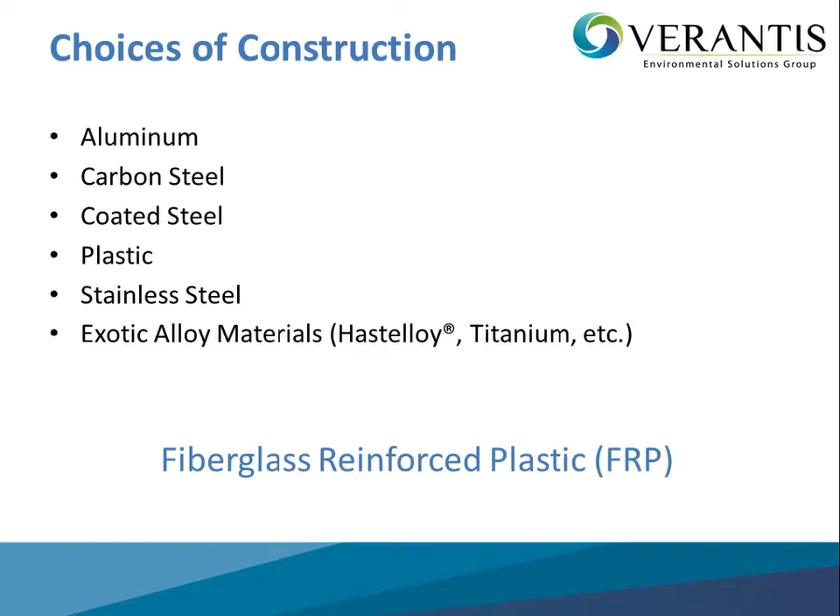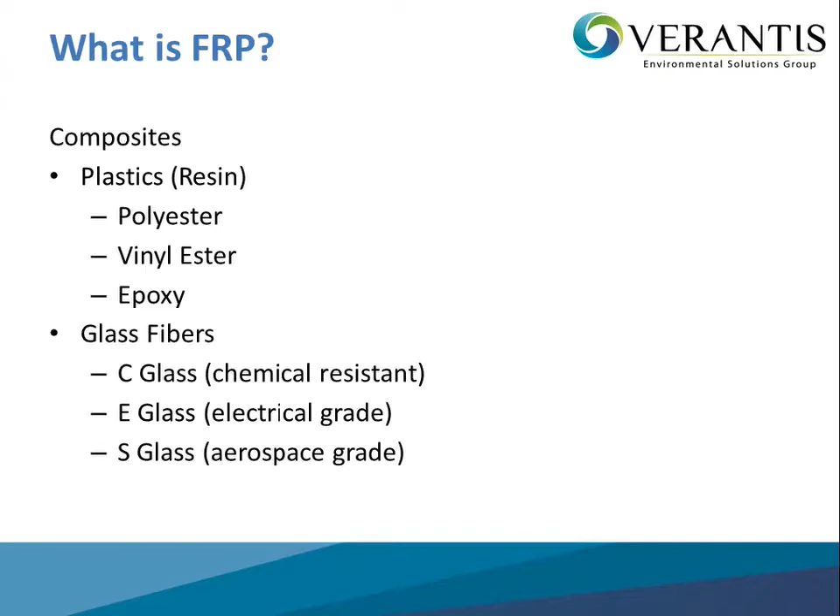And that leads us to the discussion of FRP. FRP is fiberglass reinforced plastic. It's a composite material of plastic and fibers used for strength. Some of the more common resins are polyester, vinyl ester, or epoxy. The glass fibers used in industry are a C-glass, which is chemically resistant, an E-glass, which is an electrical grade, or an S-glass, which is used for aerospace applications. Verantis is standardized on the use of premium vinyl ester resin and a mix of C-glass and E-glass.

So what makes FRP so special? The number one reason people investigate the use of FRP is because the airstream that process is corrosive in nature. This means using a metal fan or a metal coated fan is not a desirable option because the material of construction is not compatible with the process. FRP is typically less expensive than most alloys, especially hastelloy and titanium. The glass fibers used strengthen the resin and make them an incredibly strong composite.

FRP, since it's not metal, is incapable of generating a spark by the material hitting against itself. Whether the fan is moving corrosive air, sitting in a corrosive environment, or baking out in the sun all day, FRP fans last longer and are more durable. For example, we have an FRP fan in the New York area that's been running 24/7 for the last 35 years, and they've only had to change out bearings and belts on it. They've taken good care of that fan to keep it running long.

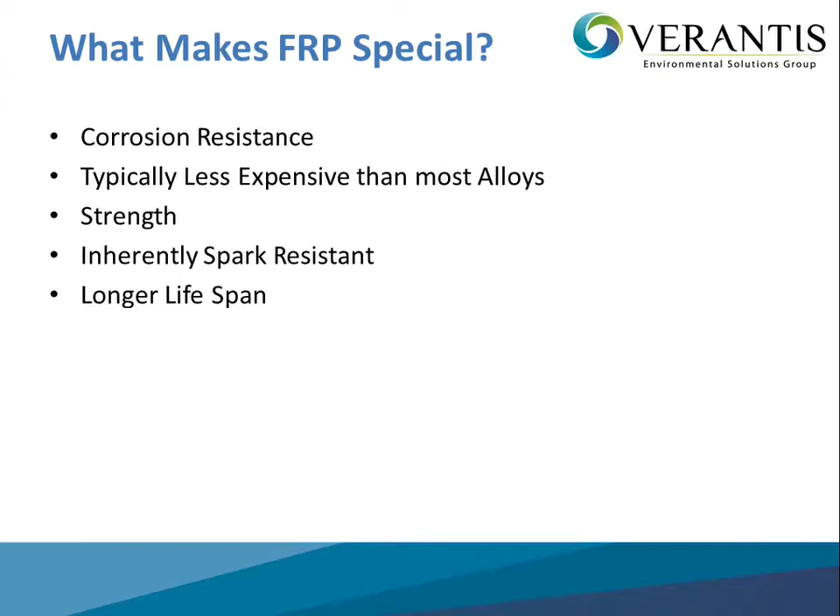So how is FRP fabricated? There's a couple different methods. We've highlighted a few of them. The first being hand lay up. This is a process that we use in our impeller department, as well as other parts of our fabrication process. The picture on the right shows them rolling out the mat and the resin in that arc shape, which is used for the impeller blades themselves, and attaching the blades to the back plate.

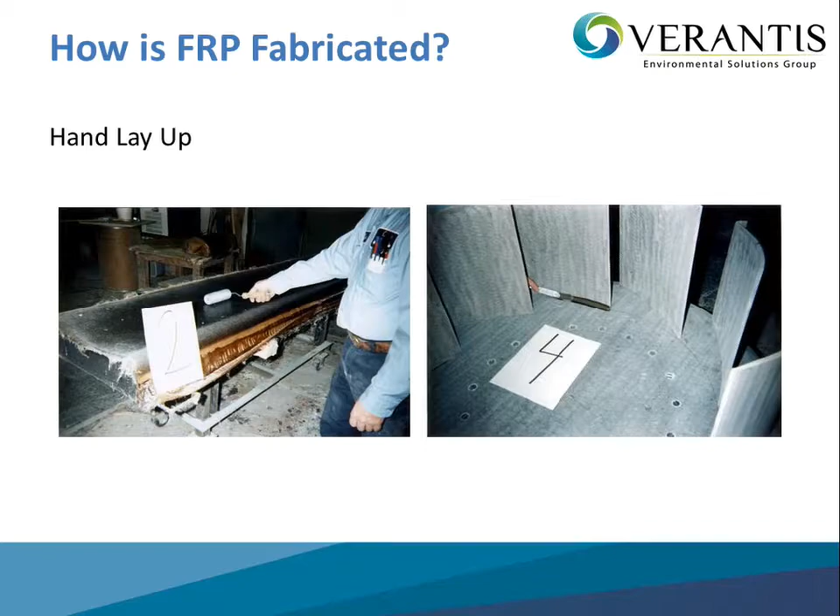There's also chop spray molding. You can see here that there's a continuous feed of glass, which is chopped in with resin as it's sprayed out the end of the gun. This process is used to fabricate parts that we have molds for, used for a variety of parts such as belt and shaft guards, inlet bells, some of our fan housings, and transitions.

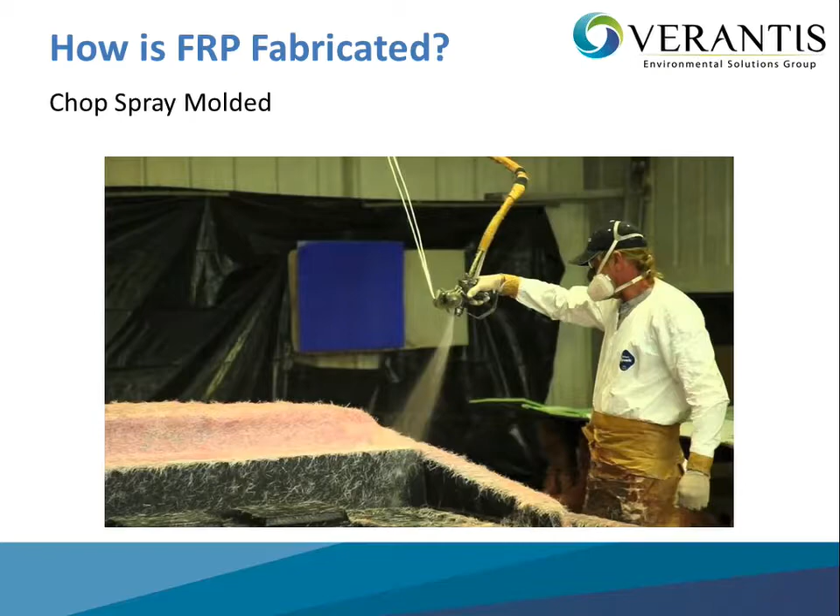A couple other ways that FRP is fabricated out there is vacuum bagging. Usually you'd see this with boat fabrication or large solid pieces of FRP. And there's also injection molding.

A lot of different industries out there where FRP can be used. Some of the more common ones are listed here: a wide variety of chemical processes, particularly hydrochloric acid and chloride salts; food processing plants; pulp and paper, which uses FRP to exhaust chlorine dioxide fumes from paper washers or pulp washers in bleach plants; metal processing and refining, where FRP is one of the best choices because of the high concentration of chlorides, while metal alloys only offer limited protection; semiconductor manufacturing; pharmaceuticals; mining, particularly salt mines and other mining processes where methane gas needs to be vented out; rubber and plastic manufacturing; and my favorite, wastewater treatment plants, where they have to exhaust hydrogen sulfide and odor control.

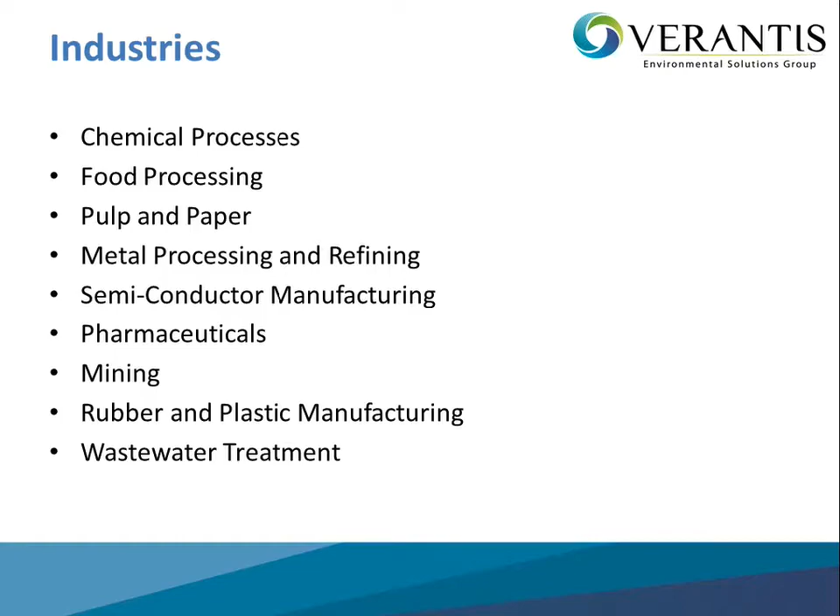This is a look at what's inside our Verantis FRP. The top picture shows an impeller construction, the bottom shows the housing. Notice the airstream surface corrosion barrier layers, made up of C-Veil, 1 ounce of mat, and 2 ounces of chop spray mat. The structural layers in between will vary depending on the thickness desired. The C-Veil may be substituted with Nexus, which offers added corrosion resistance for specific applications. The exterior of the fan is covered with a top coating which contains a UV inhibitor.

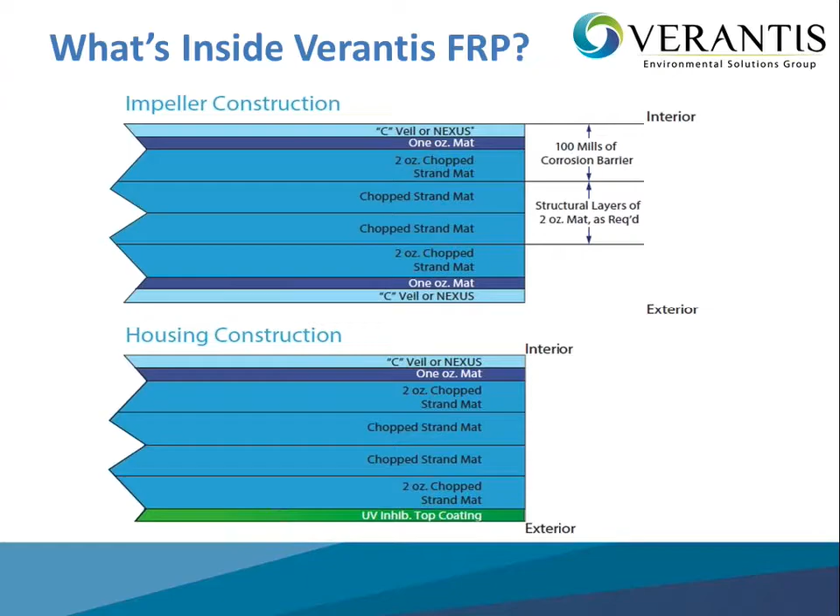This is a list of some of the things Verantis has settled on as standards in our manufacturing process: chemically resistant C-Veil on all interior surfaces, which can also be substituted with Nexus; a fully FRP-encapsulated steel hub; one of the fans that truly has no exposed metal in the airstream; and our impeller hub protrudes out of the housing so that no part of the shaft is inside the housing.

Our balancing exceeds industry standards. As mentioned, we have a UV protective coating on the exterior surfaces. The resins we choose to use have a flame spread rate of 25 or less. We've standardized on oversized bearings and shafts to increase life expectancy. We also use 316 stainless steel bolting and fasteners, FRP OSHA guarding, and our product is very customizable with reasonable lead times.

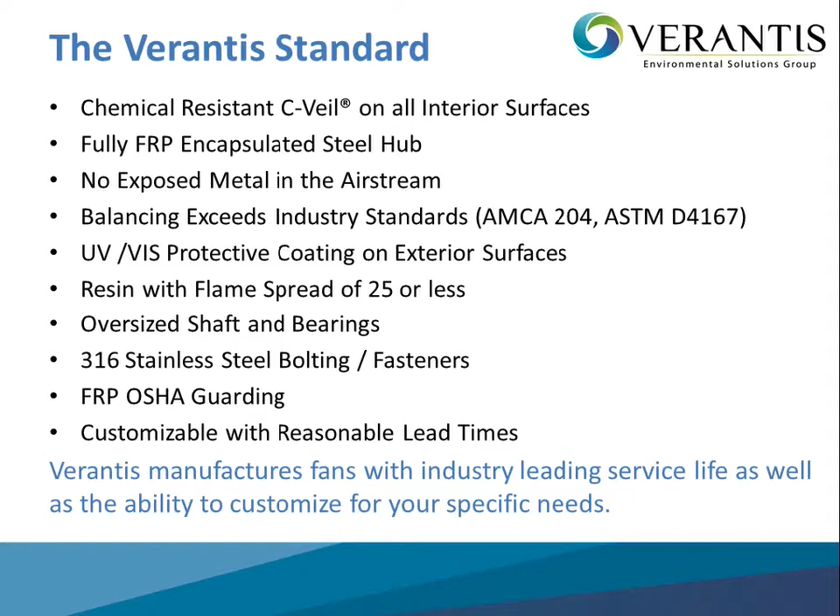All these words are great, and a picture can speak a thousand words, right? As part of our R&D efforts, here are some differences that set us apart from the rest of the industry. On the left is a picture of a carbon steel shaft which sat outside and got rained on; within a couple of months it was completely rusted. Unpainted shafts will start to corrode in as little as 24 hours. On the right is our standard carbon steel shaft, which we paint after assembly, greatly extending service life with reduced corrosion.

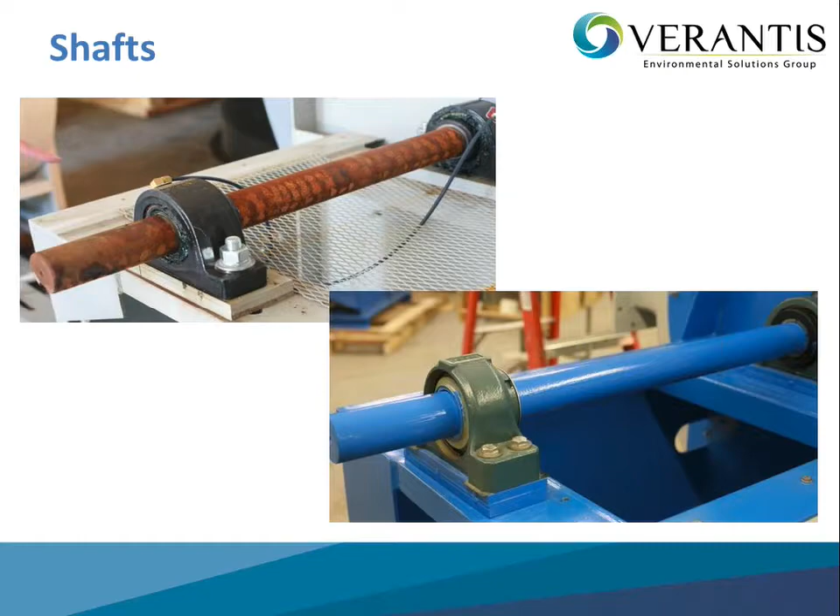In the airstream, the picture on the left shows a shaft permanently bonded to the hub and then encapsulated in FRP, but they neglected to coat the entire shaft, which will come in contact with the airstream. On the right is a picture of our fully encapsulated hub, which protrudes out of the housing in order to comply with the requirement that there's no exposed metal in the airstream.

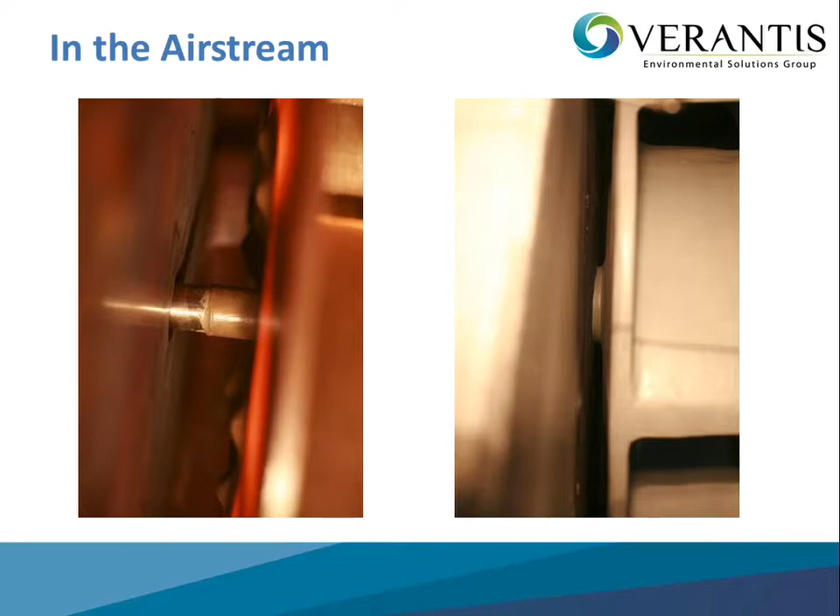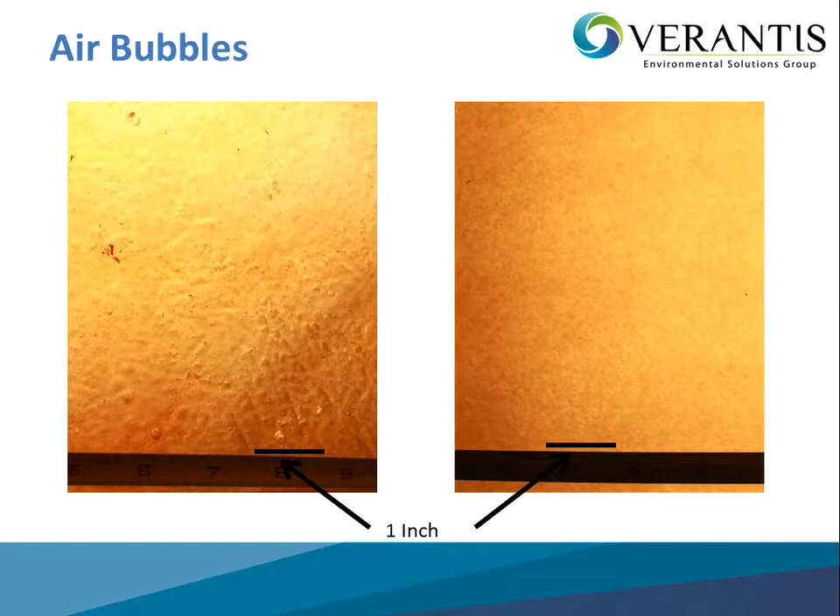Air bubbles will reduce the strength of FRP, but most importantly they may seriously affect the corrosion resistance. According to ASTM C 582, there are standards on entrapped air bubble sizes and quantities per area. The picture on the left violates both of them. The picture on the right is our FRP, which is clear. For those who think I just picked a small section of the good and the bad, this is a picture of what we cropped to show that—so you can get a bigger idea, 10 inches on each side, of what the FRP looks like.

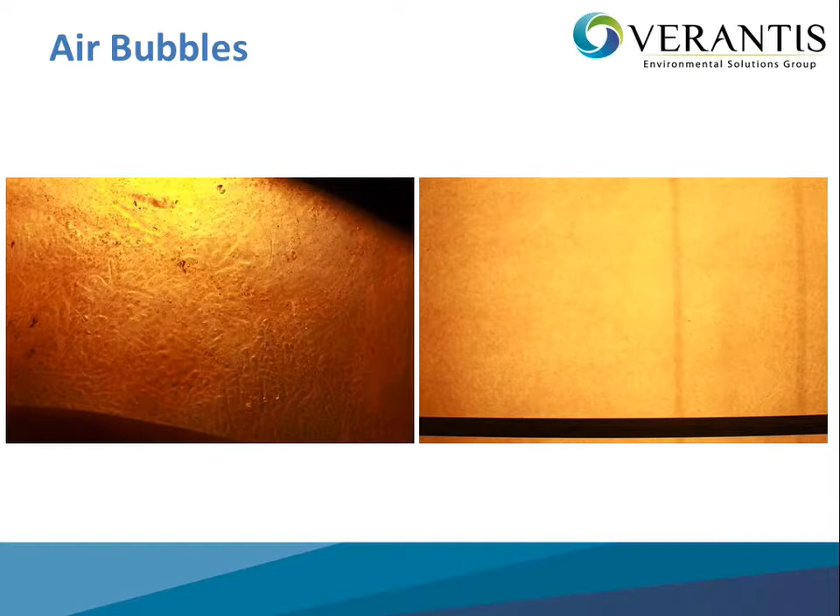Uniformity of construction. Our competitor on the left shows irregular surfaces that can cause uneven buildup of contaminants, increased vibration, and instability. It can also compromise the integrity and strength of the impeller. On the right is our impeller, which stays in balance for longer periods of time and is not subject to the same problems as our competitor.

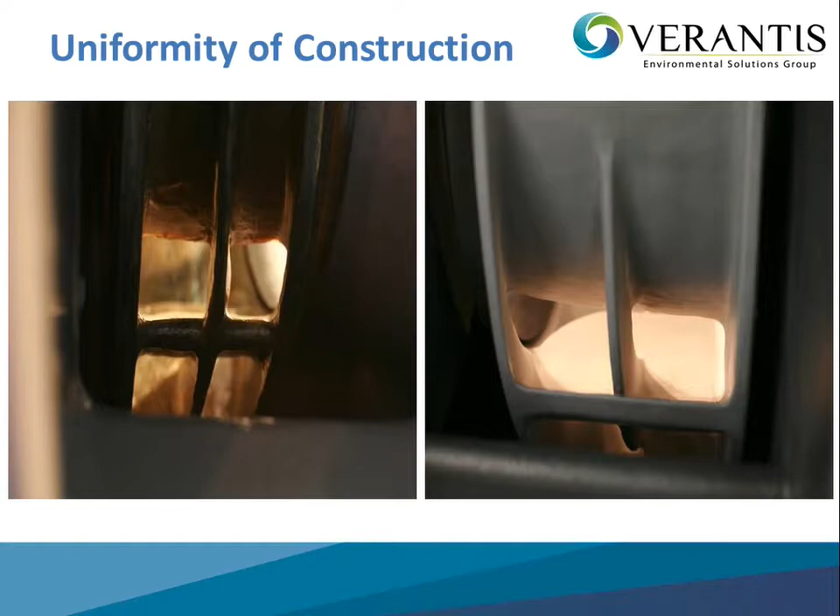Now in balancing, we always add weight to our impellers when balancing. Adding dissimilar material, as shown on our competitor's fan on the left, can be prone to delamination and can result in unevenness and problems when balancing. If you look right here, you can see this is already starting to flake up a little bit, which is going to be subject to attack.

On the right is our impeller, which stays in balance for a longer period. But what we do is when we add weight, we add the same material, the same chop mat and resin that the impeller is made out of. It's really hard to see, but this right here is where we've added the weight into the impeller, and it's seamless.

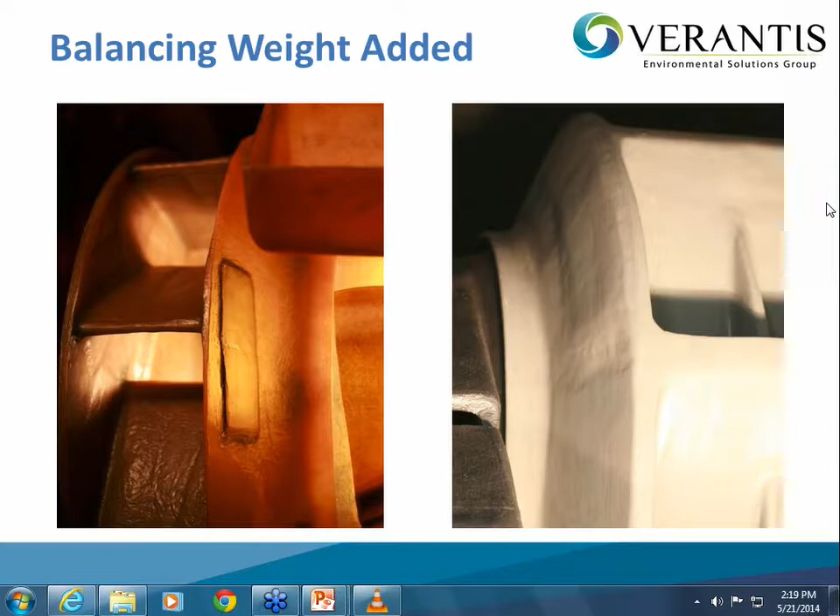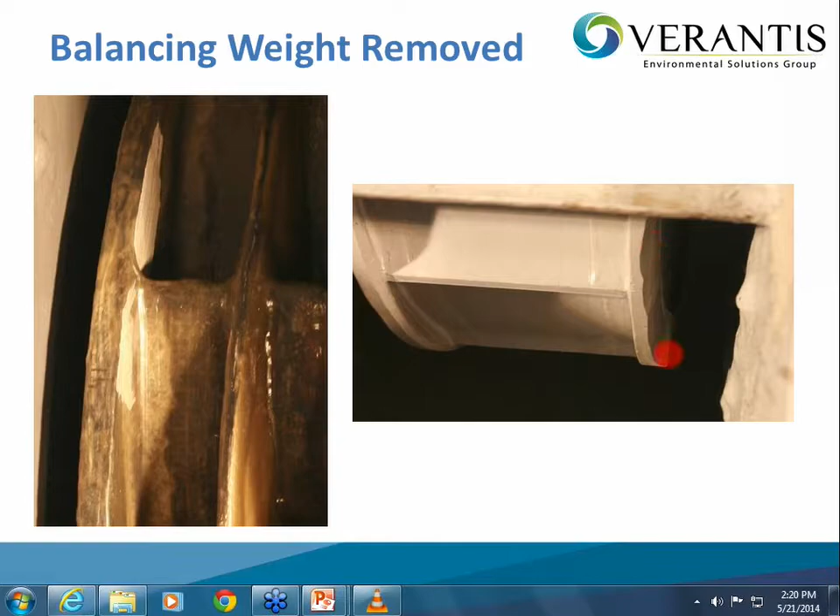These fans, these pictures that were taken, were of unused fans, so this hasn't seen any chemicals or run. On the right-hand side here, you can see where they took this plastic impeller and ground it down. That's going to basically lead to unevenness and ultimately to an imbalance of the impeller.

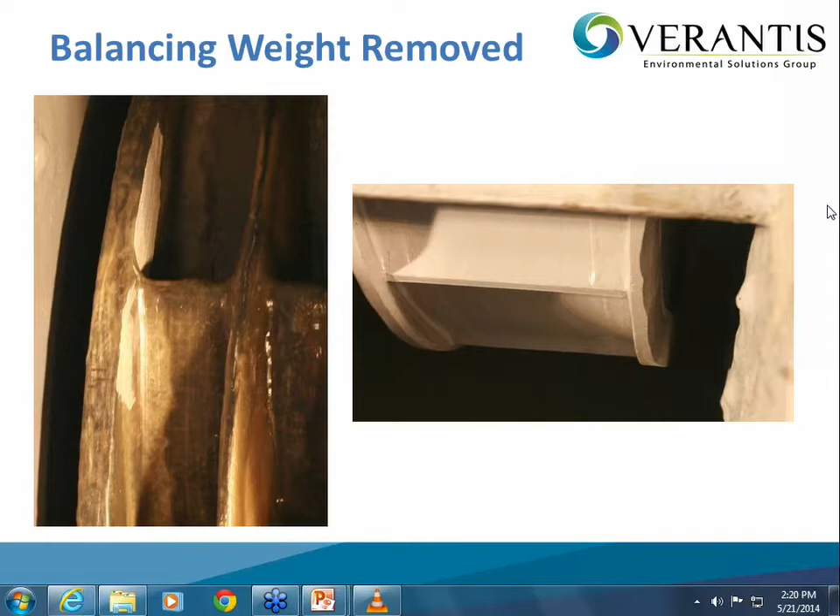Now, clear resin - sometimes projects require that no pigments, dyes, or colors be added to the resin. Both of these pictures are examples of clear resin impellers. The competitor on the left-hand side, the resin and the FRP was set up too fast, and it isn't actually colored, it's actually burnt because it overheated.

You can see the excessively large air bubbles. This is the same impeller I showed just previously. You can see the air bubbles that have started to form right here.

That term is actually crazing, and crazing is heat-induced stress fracturing.

On the right is an example of one of our clear resin impellers. You can actually stand there with a light and shine a light through it to inspect for imperfections. Not that you'll find any.

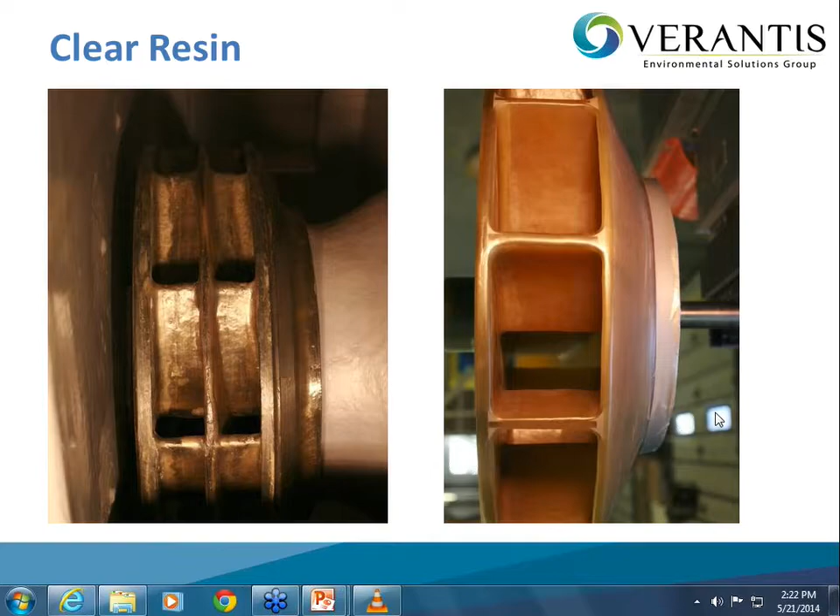So, delamination of FRP on plastic. The left is an example of one of our competitors that fabricated a plastic fan and then overlaid it with FRP in order to market this as an FRP fan. It's very difficult to achieve a strong bond between two different materials, and as you can see, there's a crack right here and one right here where the FRP is already starting to pull away from the plastic. Again, these haven't been used or run in a contaminated area, but that's certainly some points for attack right there.

On the right-hand side, you'll see the smooth consistency of the inside of our housing, which is attributed to the C-veil layer.

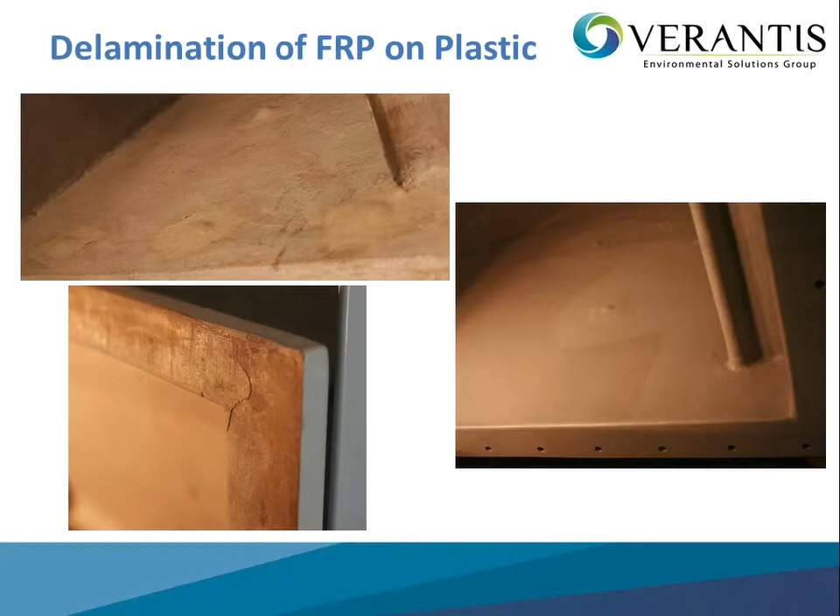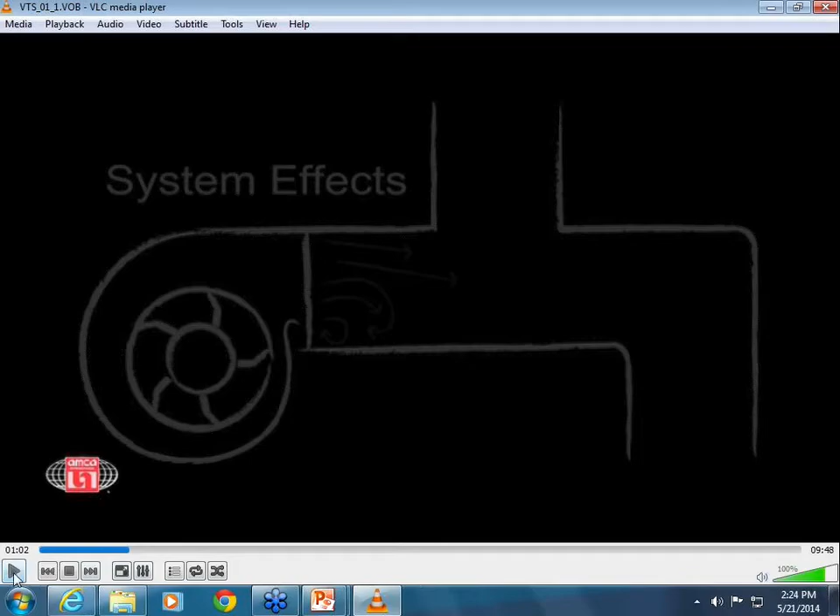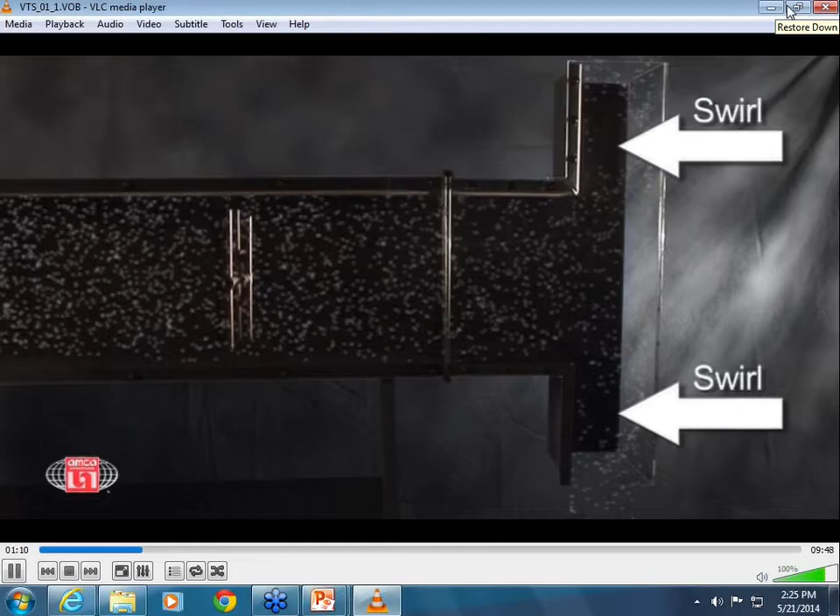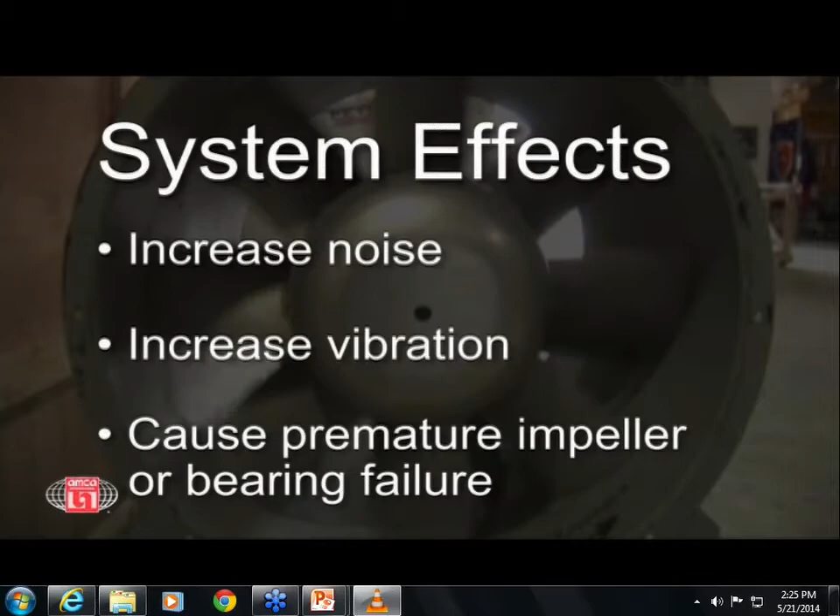System effects can be described as fan performance loss, the detrimental effect on fan air performance due to adverse flow conditions at both the fan inlet and the fan outlet. In addition to adversely affecting fan performance, system effects can also increase noise, increase vibration, and cause premature impeller or bearing failure. When designing buildings and air systems, minimizing energy use is of the utmost importance.

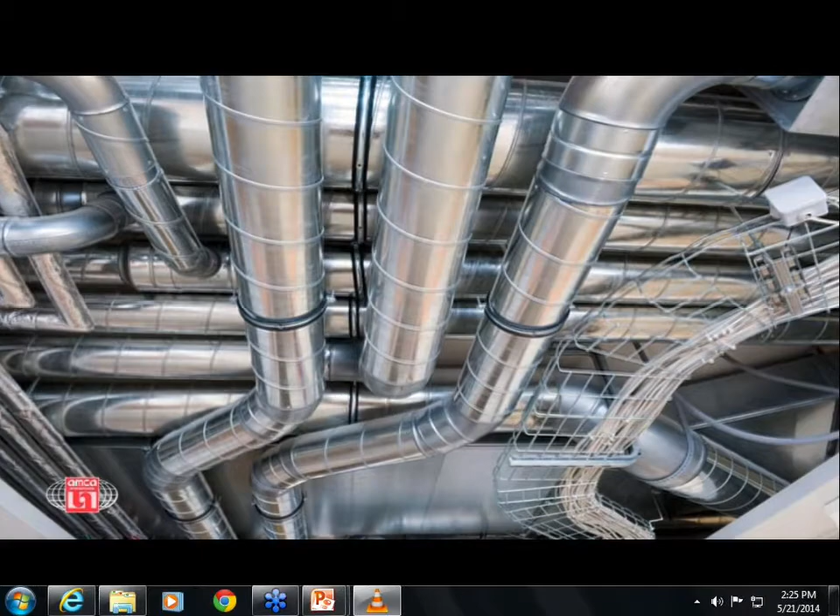The emphasis must be on eliminating system effects, rather than simply identifying and accounting for them. Quantification of system effect is necessary to evaluate improvements to existing buildings.

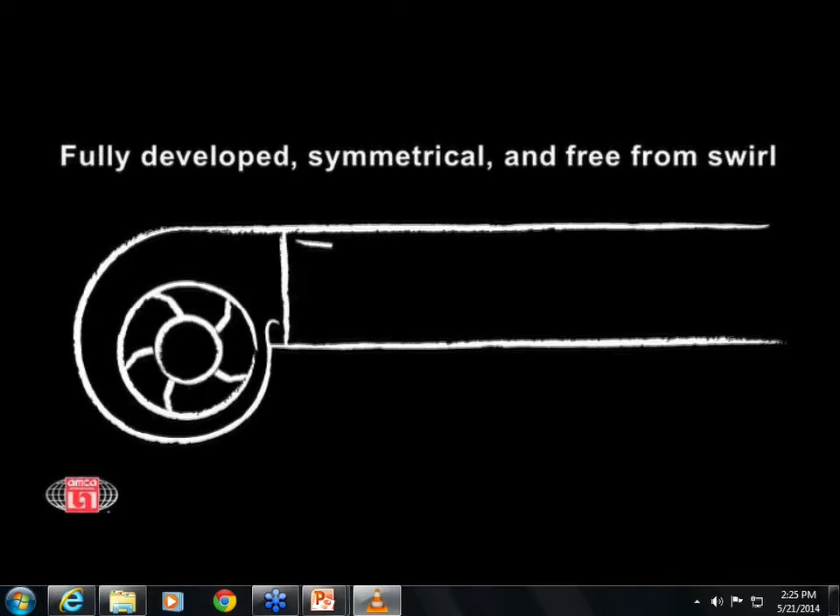For optimum system performance, the airflow at the inlet must be fully developed, symmetrical, and free from swirl. Ducting on the outlet needs to be designed so that the asymmetrical flow profile from the fan is allowed to diffuse and approach fully developed flow. The effect on fan performance when these conditions are not met is called system effect.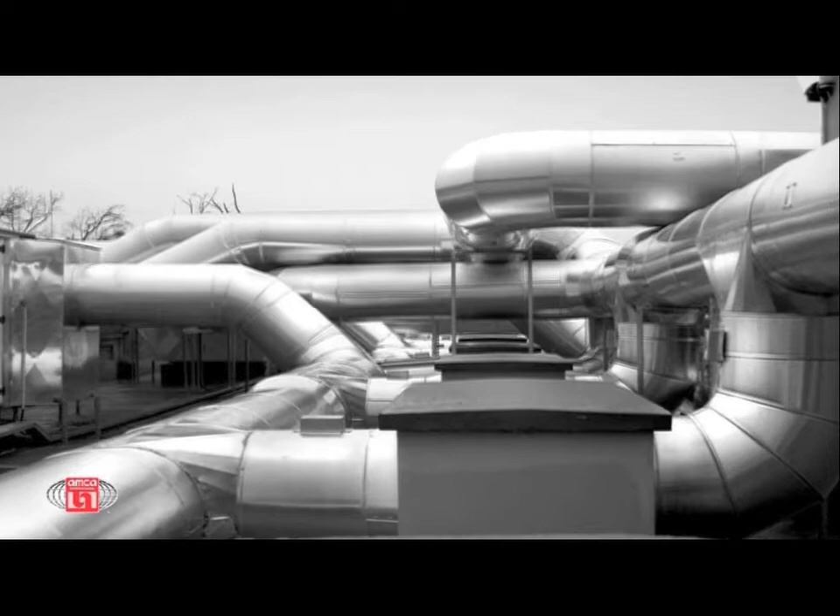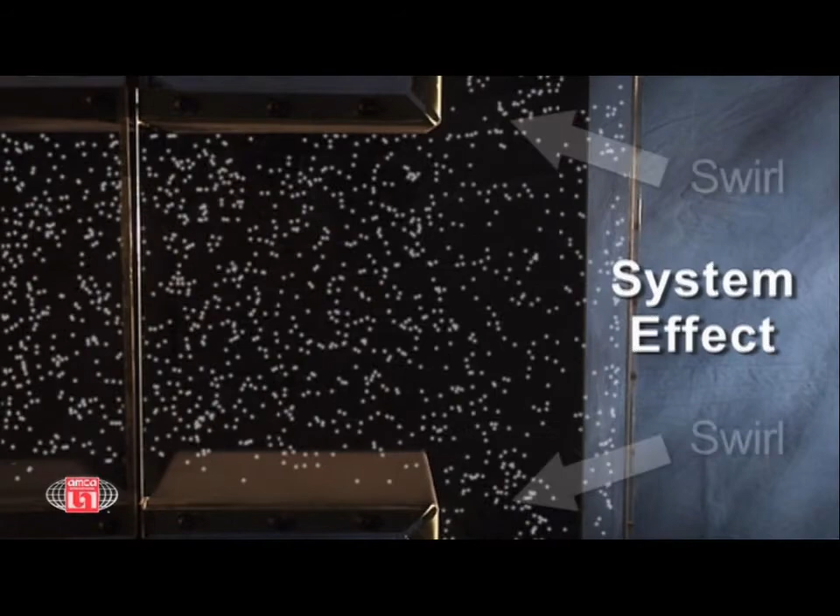You can master all the theories about how to design and specify systems to move and control air efficiently, but until you actually build and install the components, you won't really be able to understand how seemingly small changes in execution and installation can have a dramatic impact on the performance of the system. Therefore, it is important to understand system effect because of the significant impact it has on the efficiency and operating cost of the systems you design and build.

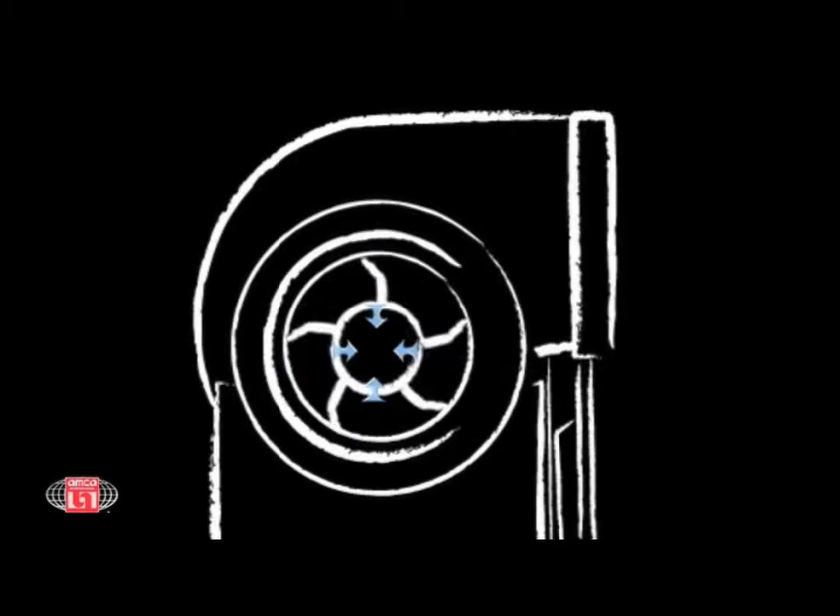System effect at the fan inlet and outlet seriously impacts airflow. The first major impact involves proper fan inlet design. As stated earlier, the airflow at the inlet must be fully developed, symmetrical, and free from swirl. Non-uniform inlet flow is the biggest cause of system loss. Factors adversely affecting inlet flow are insertion of obstructions, elbows, and dampers too close to the fan inlet.

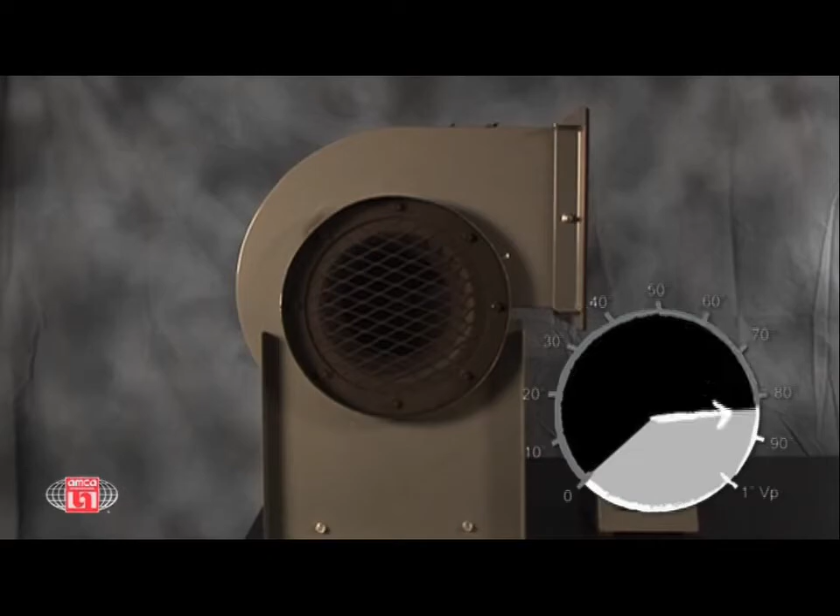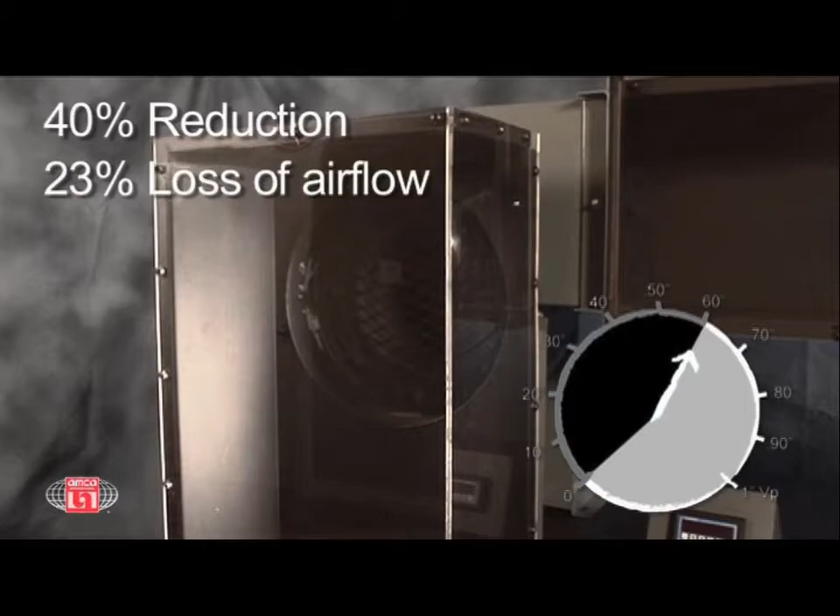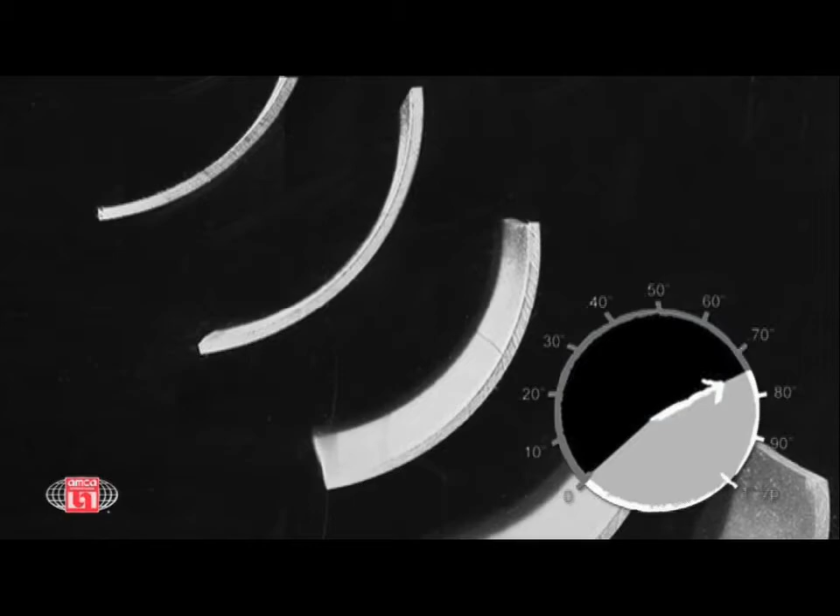Let's assume we use an open inlet as a benchmark, with the inlet velocity set to 1 inch of water velocity pressure. If we affix a poorly designed right angle inlet box directly to the inlet side of the fan, our velocity pressure is reduced to just 0.6 of an inch water, a 40% reduction, which equates to a 23% loss of airflow. If we improve the design by adding turning vanes to the inlet box, we improve the velocity pressure to 3/4 of an inch water, but that's still a 13% loss of airflow.

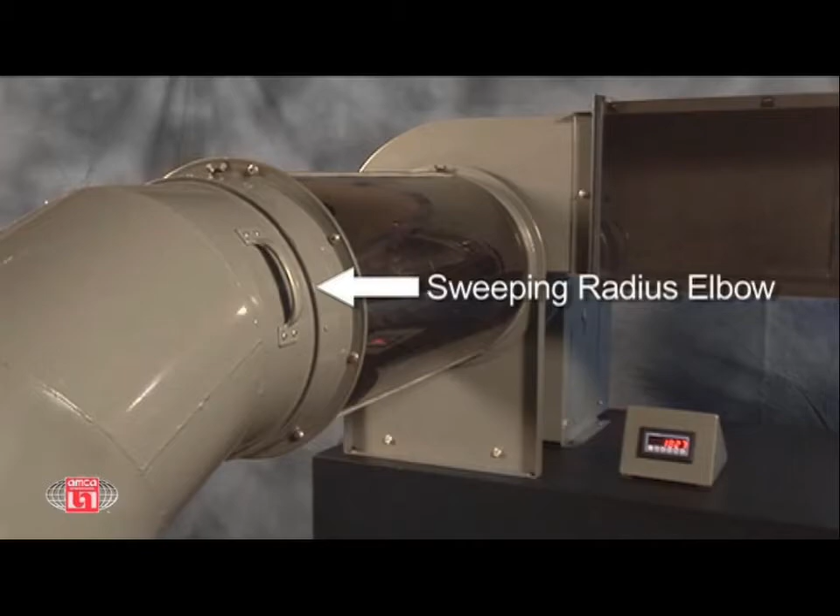Changing the inlet box to an elbow will help. Properly installed, a sweeping radius elbow will result in only a 3% loss of airflow. A good rule of thumb is that elbows near the fan's inlet should be radiused and include turning vanes when located within 3 duct diameters upstream of the fan, recognizing that mitered elbows with or without turning vanes can cause system effect even when located up to 5 duct diameters upstream.

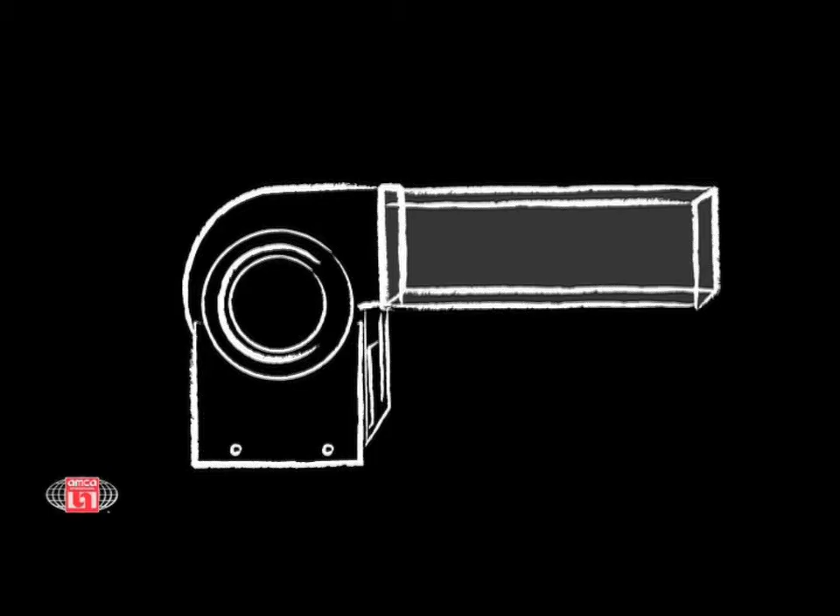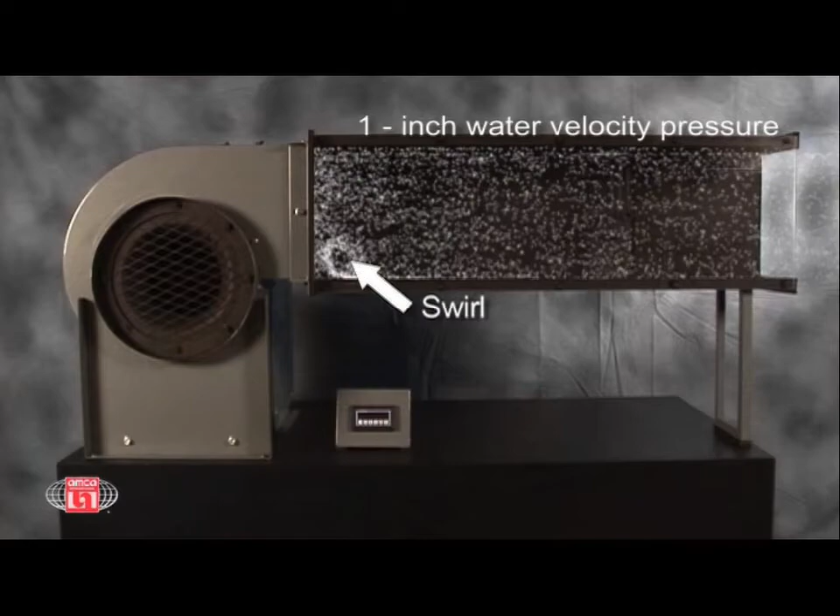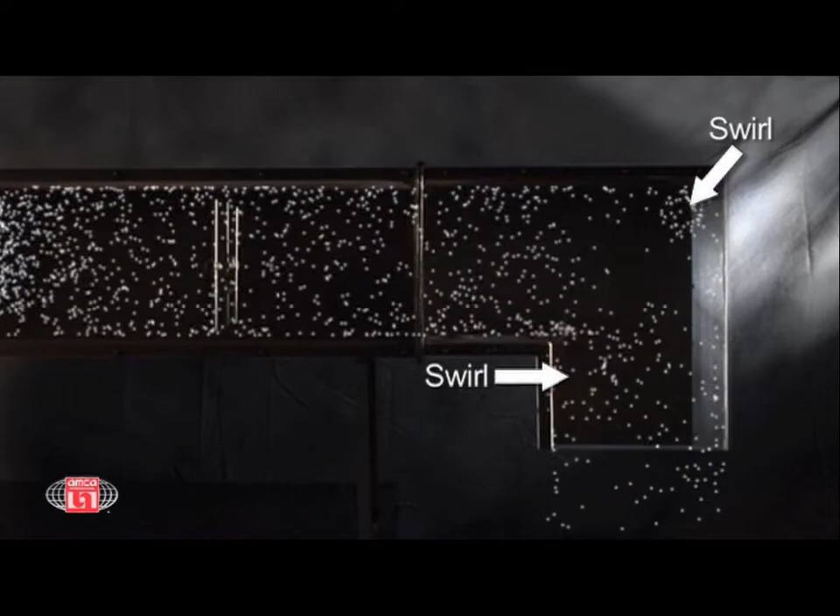The second major impact involves proper fan outlet design. The same elements that have an impact on inlet design, namely ductwork and dampers, also have an impact on outlet flow. Let's assume 1 inch water velocity pressure on the outlet side of a fan, similar to the inlet side in the example just given. If we add a right angle elbow on the outlet side in the direction of the fan's rotation, we reduce the velocity pressure to 0.85 of an inch water velocity pressure, which is an 8% loss of airflow.

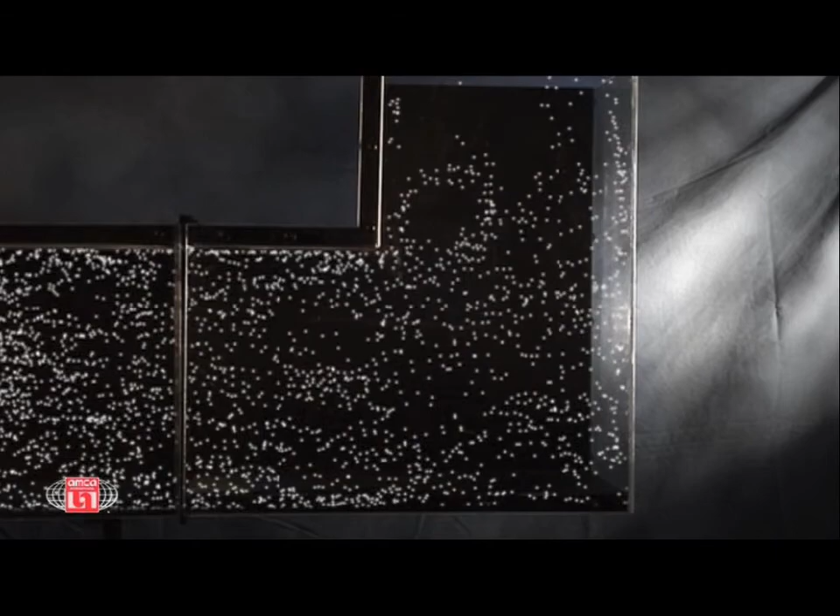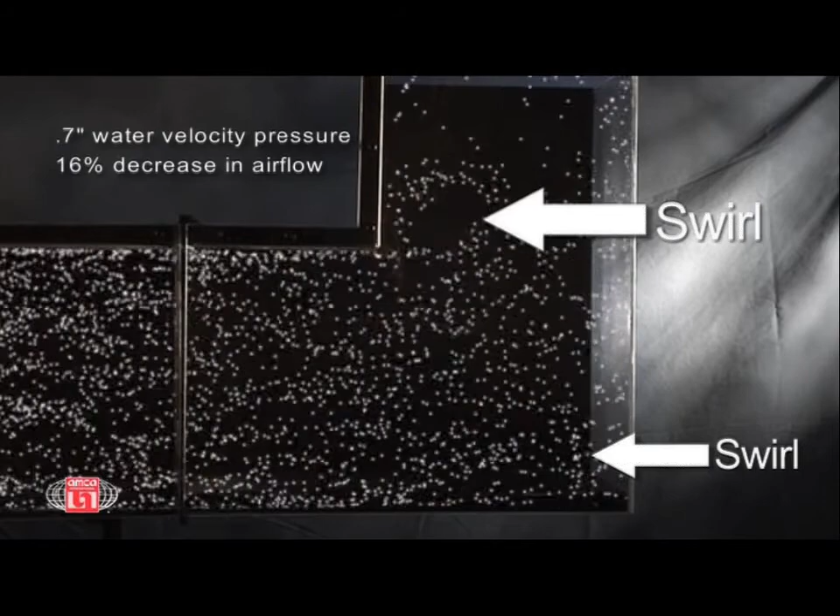However, if we change the direction of the elbow to oppose that of the fan's rotation, we reduce it even more, to 0.7 inch of water velocity pressure, a 16% decrease in airflow. So major ducting inefficiencies can occur on both sides of the fan.

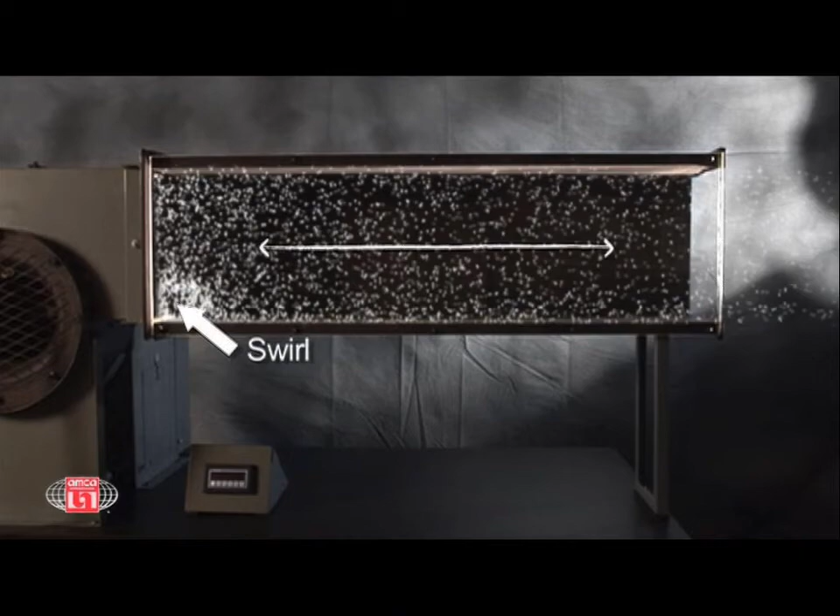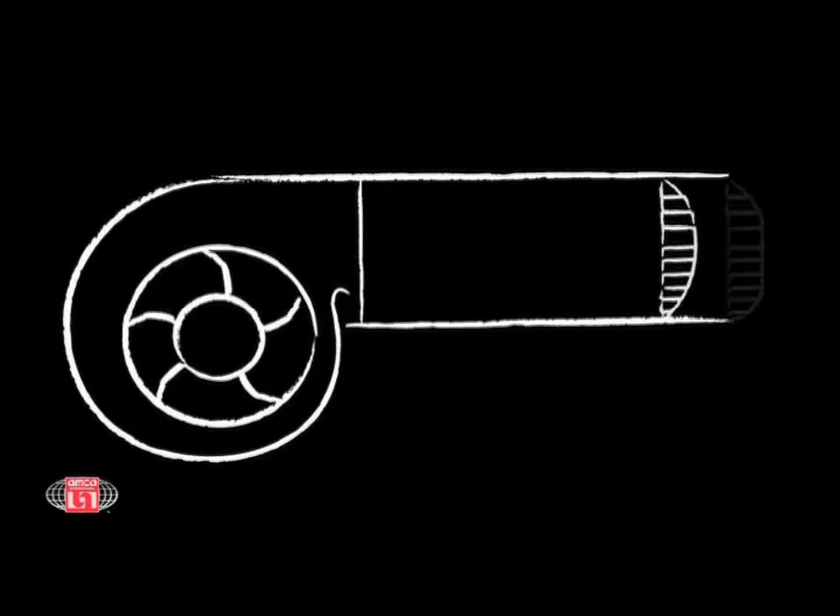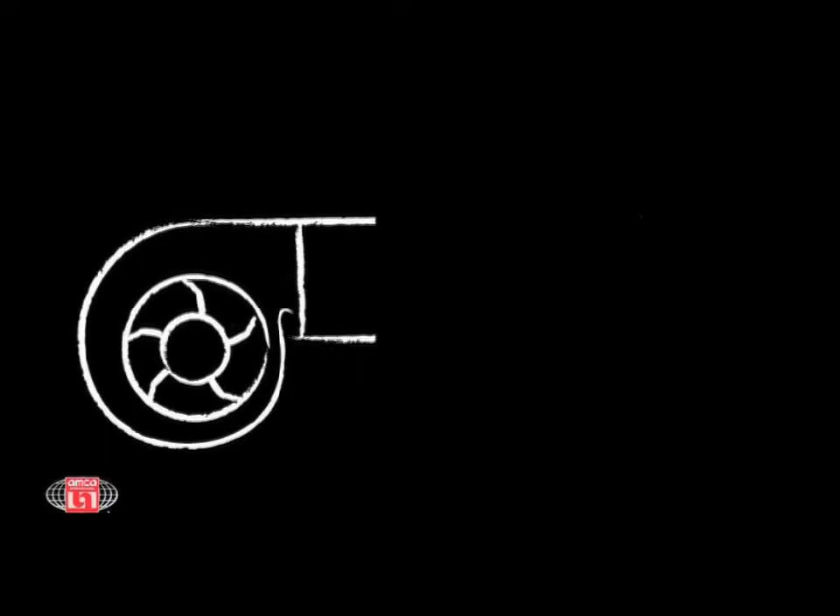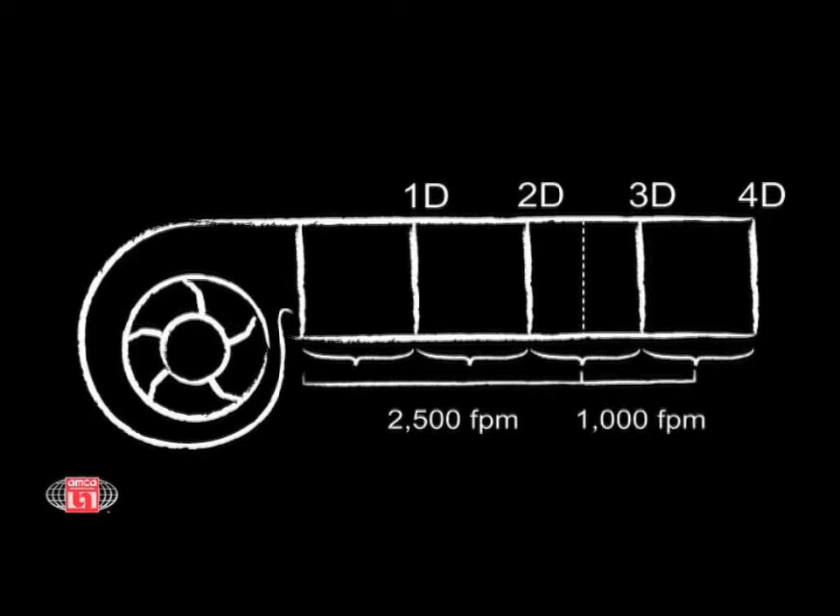One must also remember that a major additional factor is the length of the ductwork itself. You should always strive to achieve 100% effective duct length. Ducting on the outlet needs to be designed so that the asymmetrical flow profile from the fan is allowed to diffuse and approach fully developed flow. The point where this is achieved is referred to as 100% effective duct length. A good rule of thumb is that effective duct length is 2.5 duct diameters when duct velocity is 2,500 feet per minute or less, with 1 duct diameter added for each additional 1,000 feet per minute.

Testing in the AMCA lab has shown that a centrifugal fan needs 100% of effective duct length to avoid system effect, while a vane axial fan needs only 50% effective duct length. So remember, in a ducted inlet, ducted outlet installation, system effect may occur on both sides of the fan.

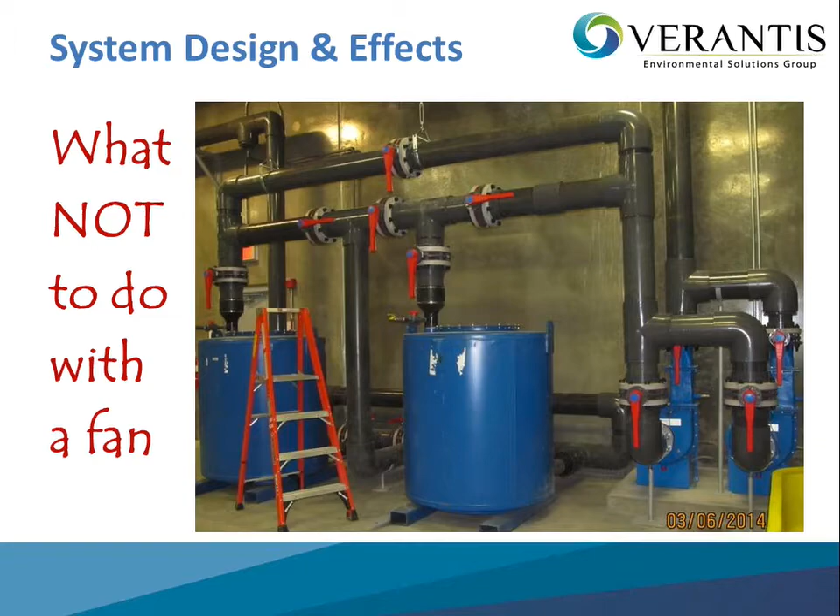To start with, they were measuring the inlet flow and pressure off this nozzle here, and they were measuring the outlet about 7 feet up this pipe on the stack.

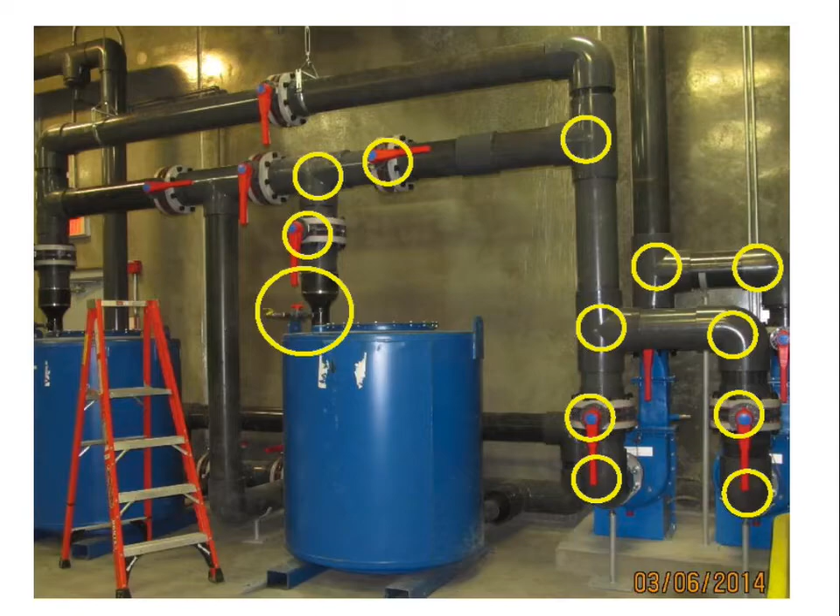So we had a lot of back and forth, with some involvement from engineering, on how we could help correct this. One of the first things we talked to them about, citing AMCA, was that they needed proper duct length feeding into the fan for proper airflow. The inlet on the left-hand side was basically a 90-degree bend right into the fan.

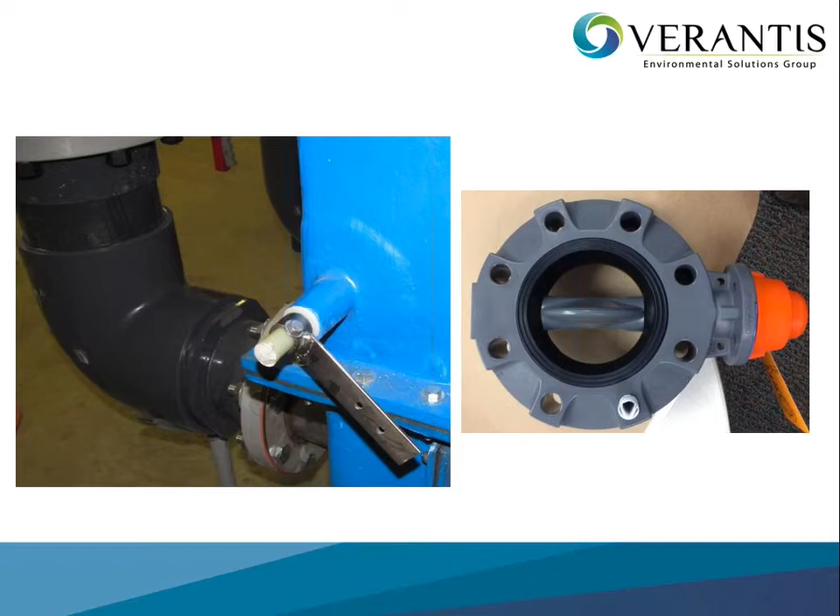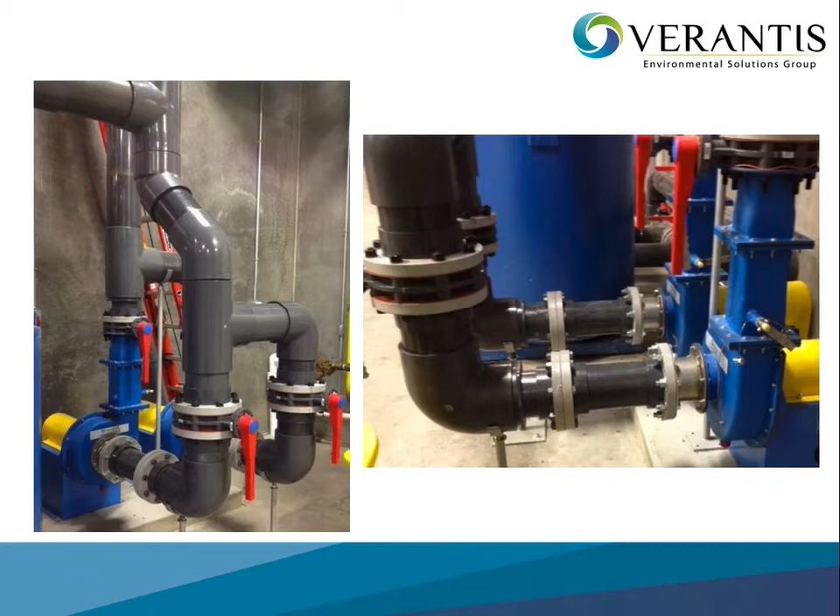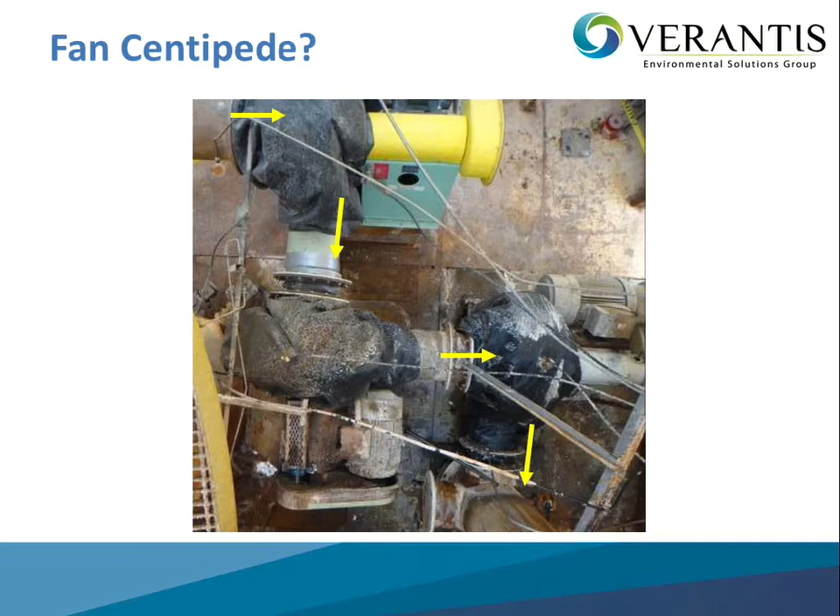Again, this is a real tough one to even know how to address. So that wraps up the presentation portion of this, and I'm going to open up the chat box here and see if we have any questions that we can address.

Should I answer that question? All right, so I have one question from Jack Shelton. Jack wants to know if he won. Jack, my answer to that question is I think that you win just by being here and taking in a little knowledge of the product.

Are there any other questions that are out there? Oh, yeah, we did actually have a question that came in right before the webinar started. They had asked why we use glass fibers instead of carbon fibers.

Basically, the short answer to that question is cost. In order to get the performance out of carbon fiber, you have to get the fiber ratios real high, which takes some very expensive vacuum bagging and autoclaving, and that's pretty much why you see it in aerospace, not in applications like this, or it's just cosmetic. You see the carbon fiber, but the fiber ratio is so low you don't get much of the benefit. So there's times when you'll see it and it looks nice, but...